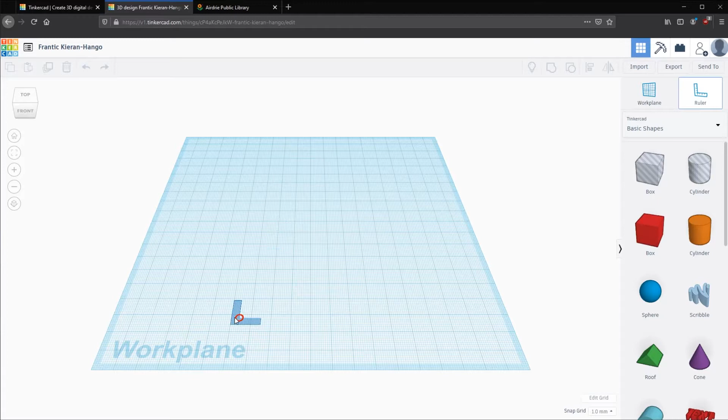So what I'm going to be creating is a little coin for my father. He plays a lot of pool or billiards, and he wants a coin so that we can decide who gets to break first.

So I just dragged out this ruler because I know how big I want it to be, and it'll help me measure that.

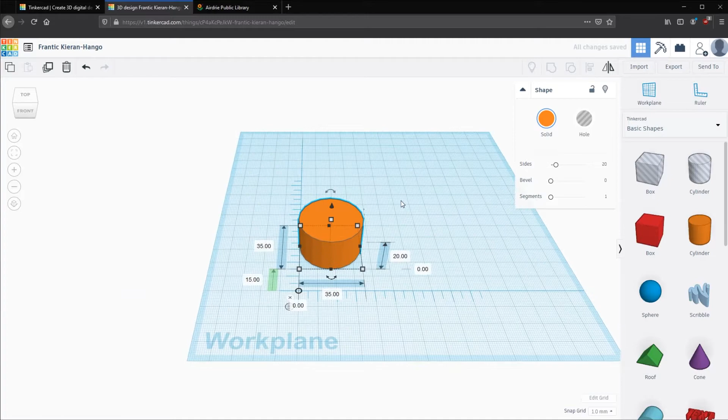So I want this coin to be 35 millimeters by 35. And then I can middle click to drag around and get a better look at this. Right click to kind of rotate around.

Let's make this 4 millimeters thick. This is a good base for our coin.

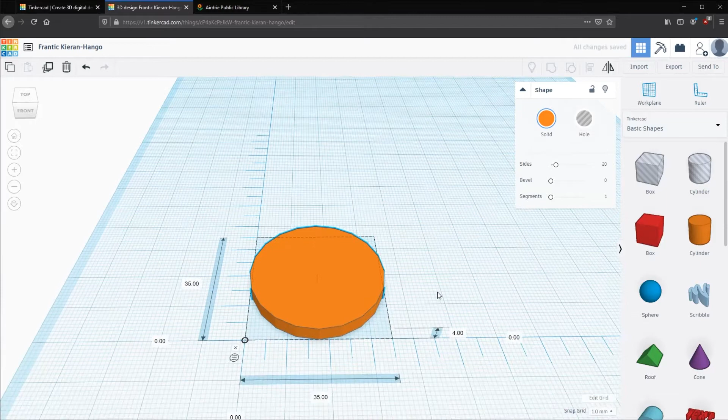Put that into the corner of our ruler, and then I can take this hole cylinder. These striped shapes are called holes up here, and so when I put this together with one of our other shapes...

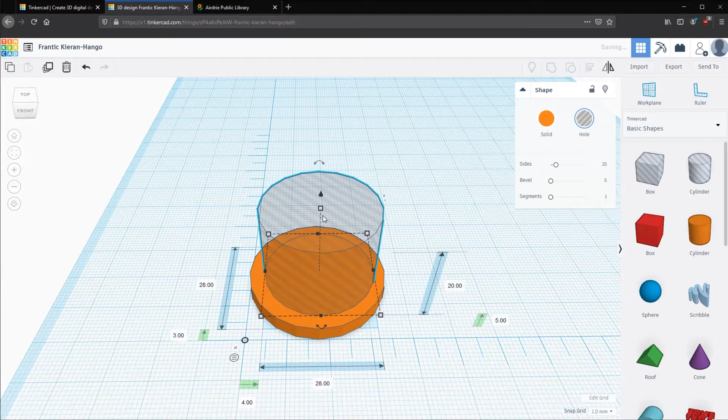I can select both and hit the group button. You can see it actually cuts a hole into that shape. I'm going to undo that because I think it's a little deep and not quite centered here, so let's just make sure that's in the center.

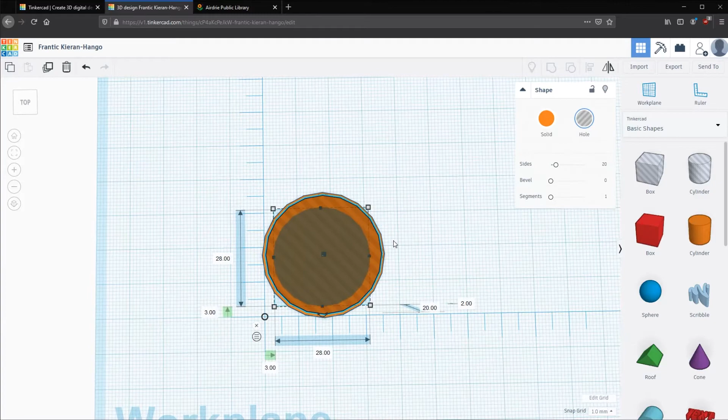This is 28 by 28. Our coin is 35 by 35.

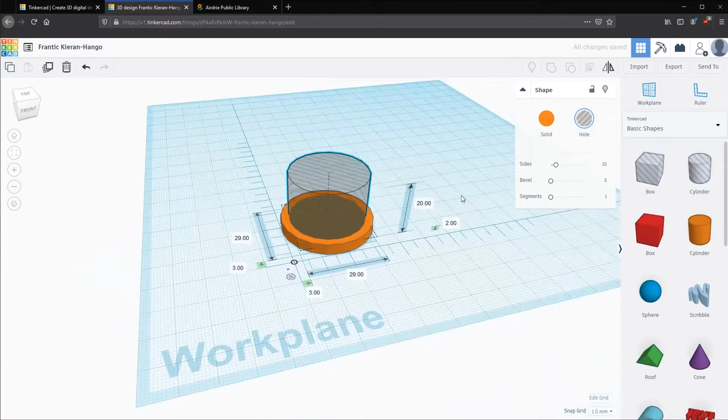Let's bring it up a little bit more. Group that and see how that looks.

Be good, quite even, but actually this cylinder, I can see all the edges of it, and I don't really want that. So I've selected the cylinder here, and I've gone onto the side here.

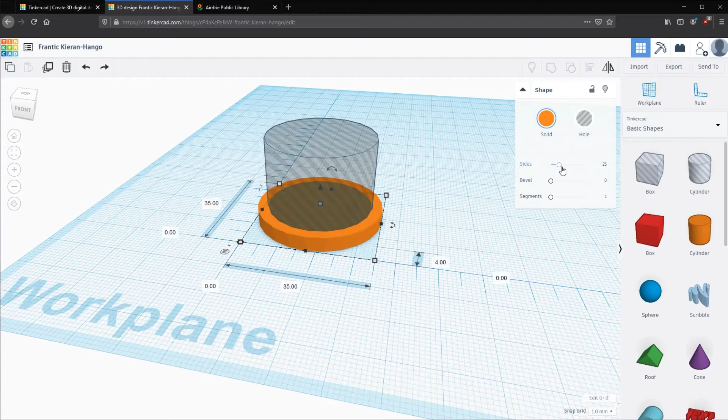I'm going to drag up this side slider, and you can see that has added a ton more sides to it and makes it much more circular.

I group these now again. That should be a little bit better. But same with this hole, we need to create more sides on this. Group that together, and there, it's a much more seamless circle.

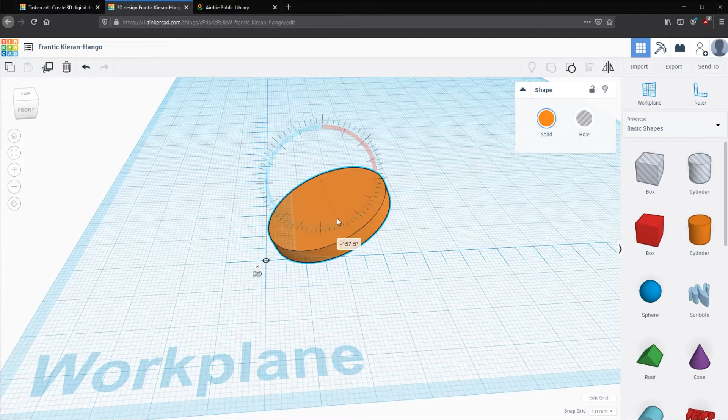I'm going to flip it over and do the same thing on the other side. Take out this cylinder, and I think it was 29 by 29.

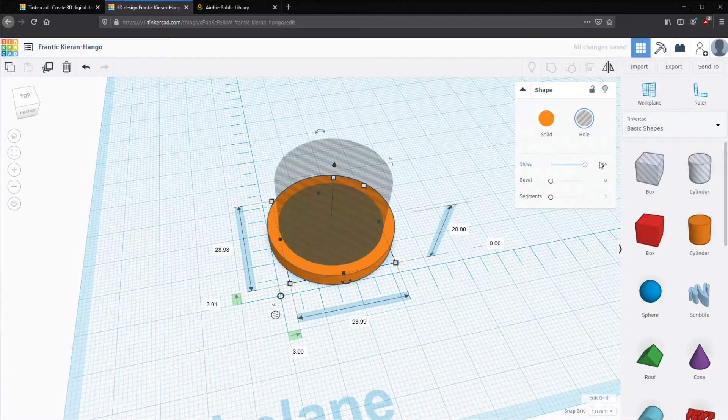Turn up the sides on it, and then group it together. Oh, that punched a hole straight through it. We don't want that. I'm going to drag it up using this up arrow, and then group it together again. There we go.

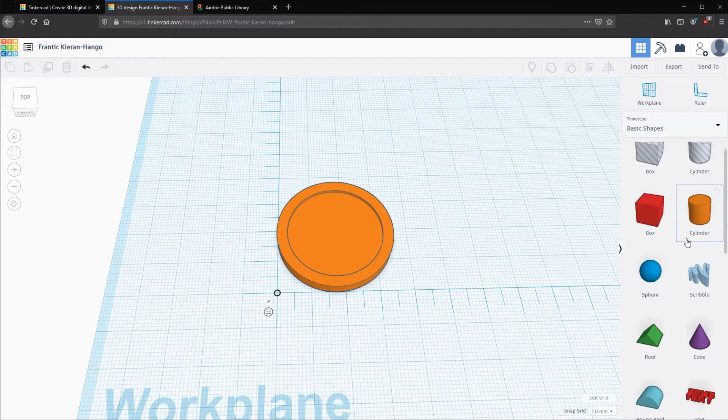So now let's put some text onto it. I just dragged out this text on the side here, and I can make it bigger or smaller.

And in the text box over here, I can type what I want it to say. It's going to be Wes's...

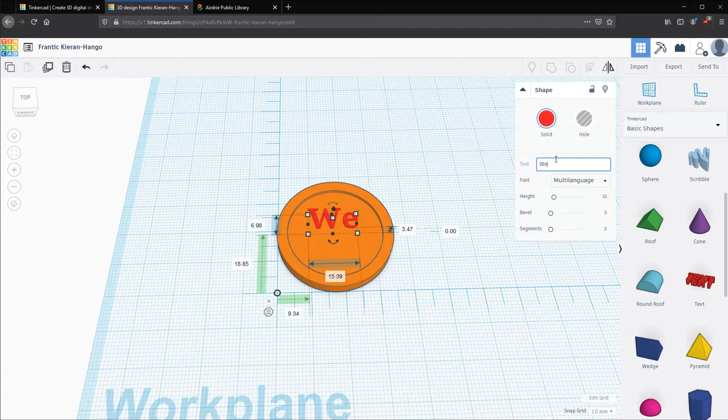One more text: Pool Hall.

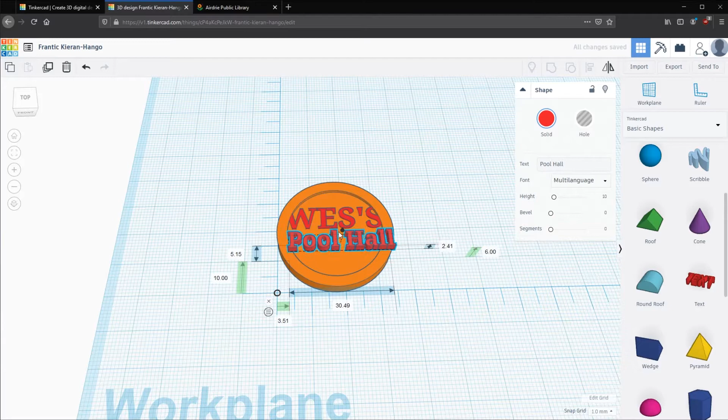Now let's get these appropriately sized.

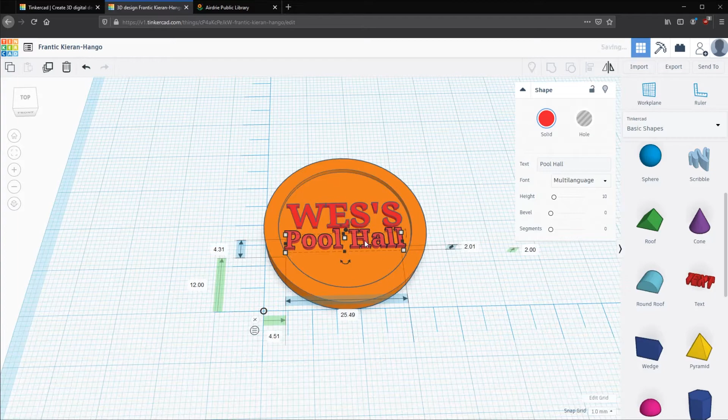How does that look? Pretty good. Maybe we can add a little more interest into it.

I'm just going to bring the box into here, make it really thin and flat, just to give it a little bit of an underline here.

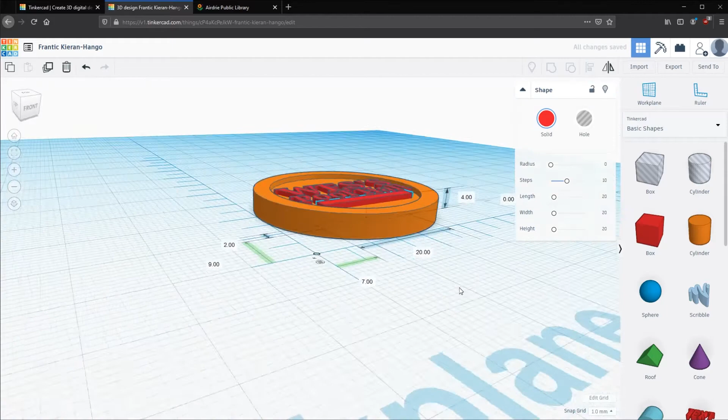Then I'm going to actually duplicate this and put it up top too.

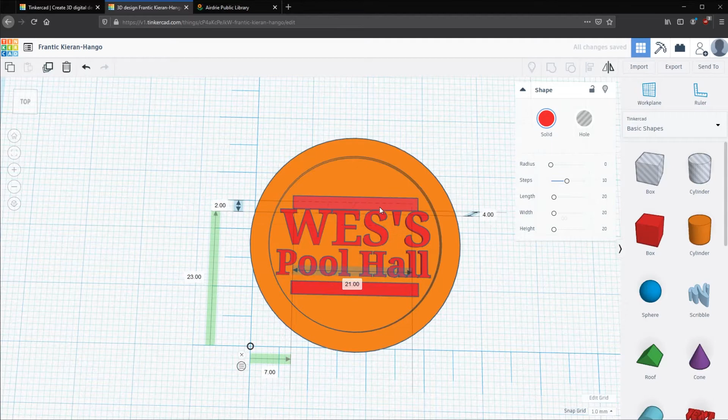Perfect. So I think I'm good with that side. I'm going to group these up again so they're all one shape. And we can see that it actually turns it all to one color as well.

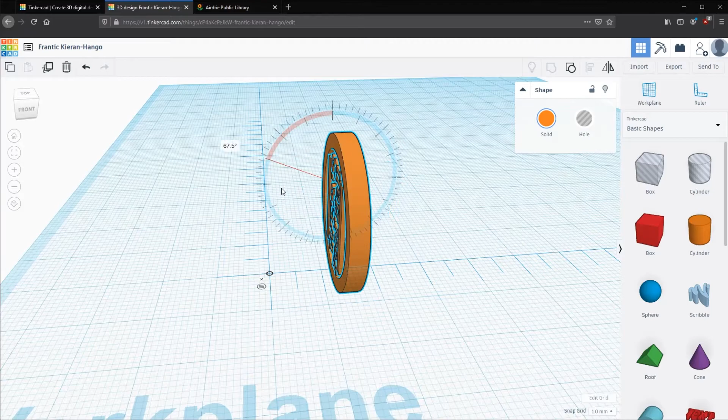Then we're going to flip it back over. And uh-oh, you can see the shapes on the other side. So we're going to have to ungroup these and make them not stick through on this side. Just by doing this.

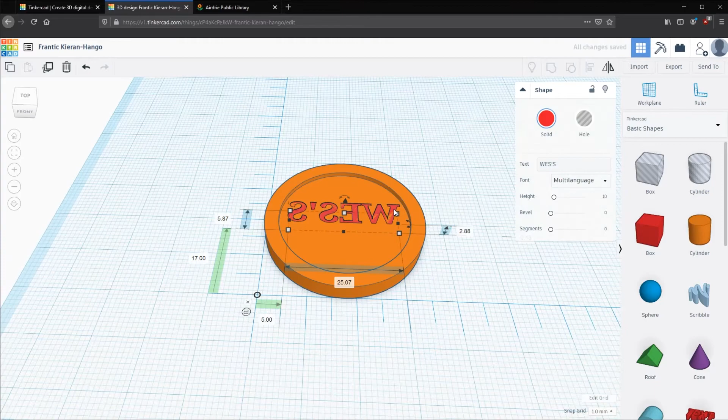I grab this, just the text. There we go. And that looks fine on this side too. Perfect.

Okay, this is our bottom. Now I'm going to make a little bit of a picture over here.

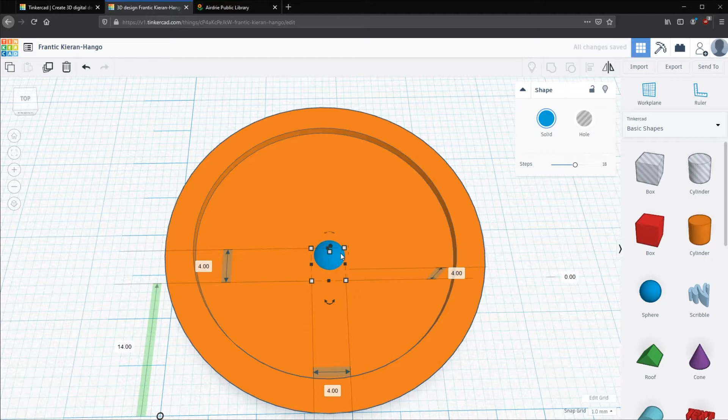I'm going to drag out some of these, and we hit Control D to duplicate.

And I'm just going to lay these out like it is in the game.

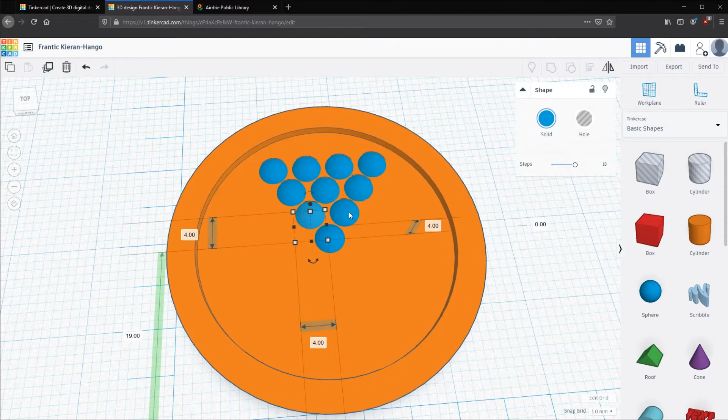I think I might add some interest to this too. I'm going to hold Shift and select all of these, move them back a little bit. Then I'm going to take these ones and move them forward just a bit.

And select these middle ones and make them just a little bit bigger. Maybe not that much - it's snapping, so down in this corner I can change my snap grid to something smaller, and it'll snap into smaller increments. You can see I have much more fine control. I just want to make it a little bit bigger as it comes forward, so it gives that perspective look.

I think this is a little too much as well, so we're going to make that snap even smaller. And these need to be a little bit bigger. I'm holding Shift just so it scales uniformly. It might be too big.

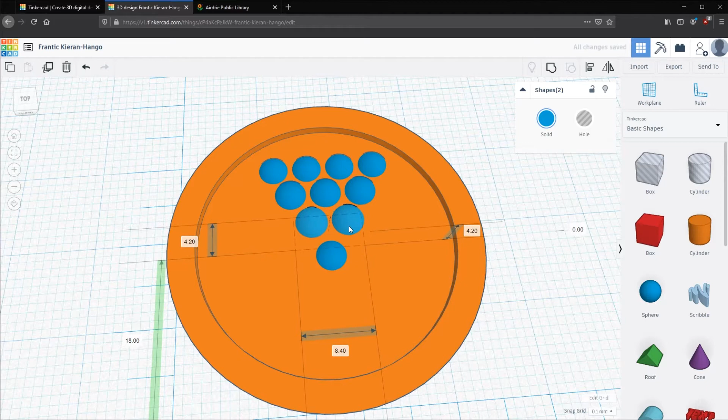There we go. Now it gives the impression that it's coming out at you - a 3D look, more 3D. And now let's make some pool cues.

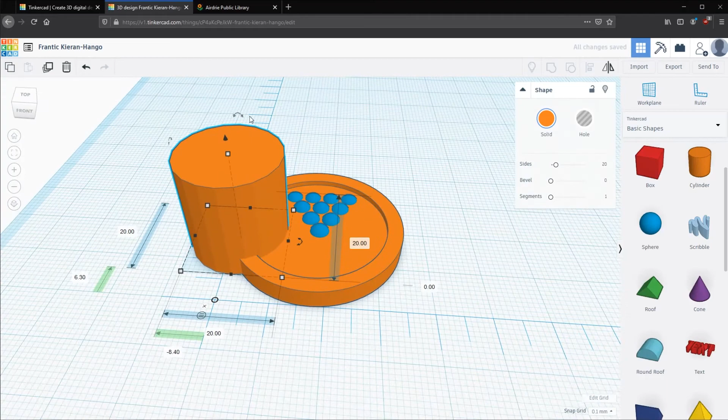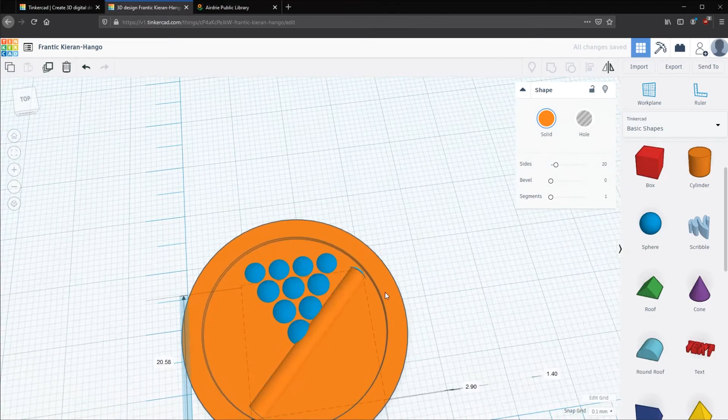I'm going to drag out the cylinder. We're going to put it onto its side. Make it small and long. Before I rotate it like that, I want to make sure I have it the right size.

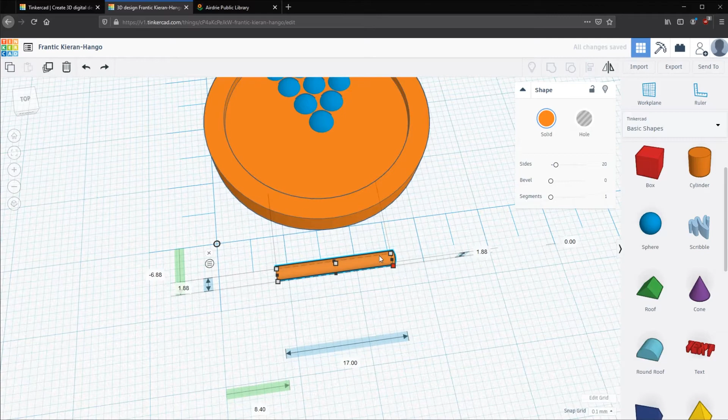It needs to be a little bit thinner. Oh, more. And let's see how that looks over here.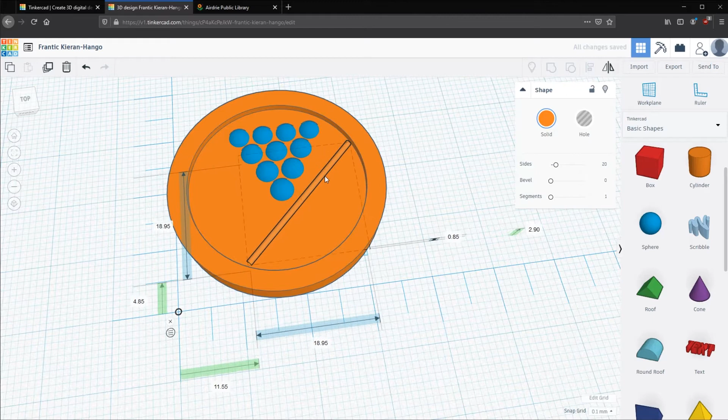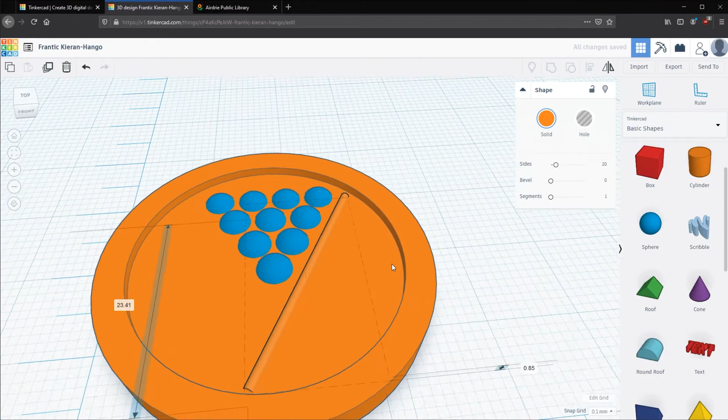That looks pretty good. Let's make sure it's attached to the rest of our coin. Now I'm going to do the same thing I did earlier, using Control D to duplicate, and then rotate it around.

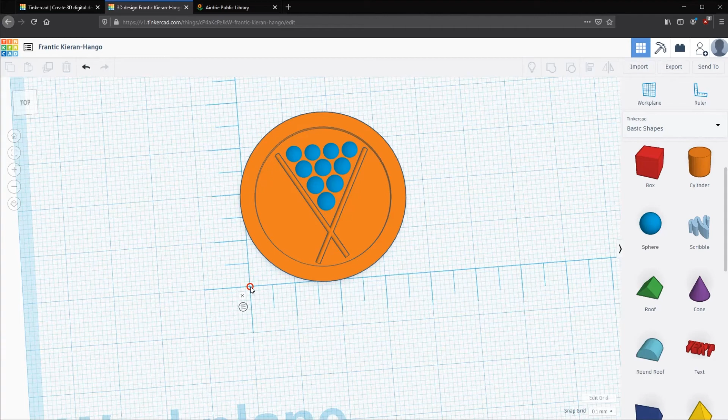That looks pretty good, but I'm not actually sure that those balls are centered on our coin. So I'm going to put this ruler right in the corner, select everything, and make sure I have it lined up with the ruler.

But 35, half should be 17.5, I think. Let me pull out my calculator just to make sure. 35 divided by 2 is 17.5, yes.

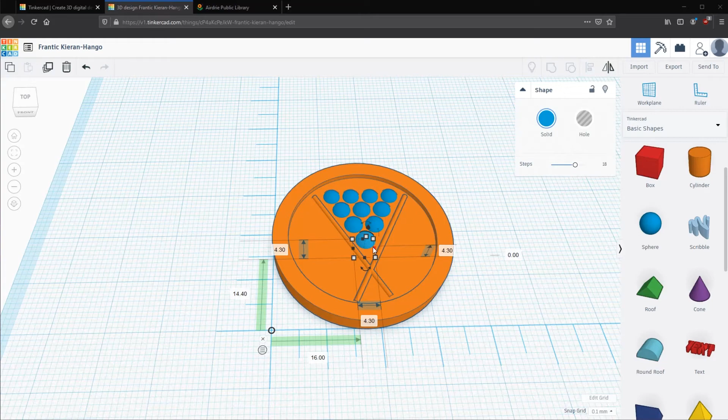So we can see that this here is at 16. We need to move all of this over a little bit just to make sure it's in the center.

Oh, and we're getting a different measurement from there. Oh, so it's measuring to the edge of the ball, not to the center. So we're going to have to do some quick math as well.

The ball is 4.3 wide. So 16.2 plus half of 4.3 is 2.15, sorry. So actually 16 is in the center. Look at that - we had it right all along.

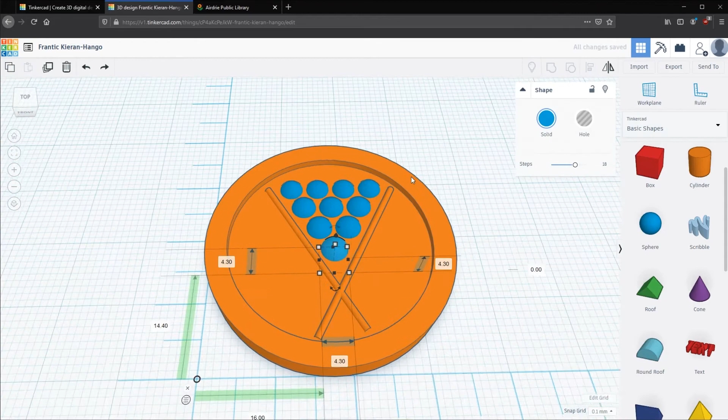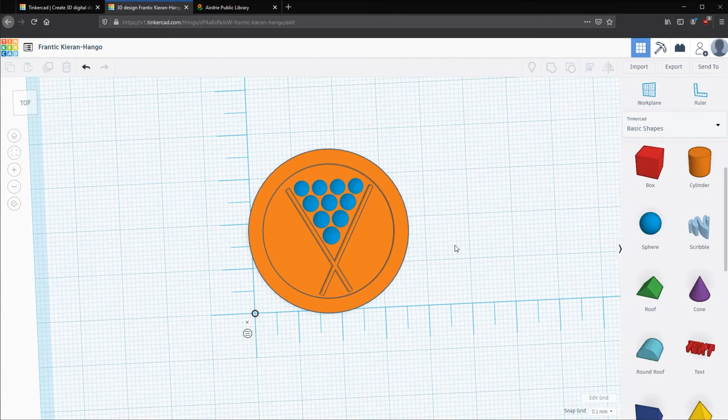Let's just make sure these cues are centered. There we go. I think this looks good.

I might make these pool cues a little bit longer. They kind of stick out the edge - we don't see the ends of them. There we go. That looks pretty good.

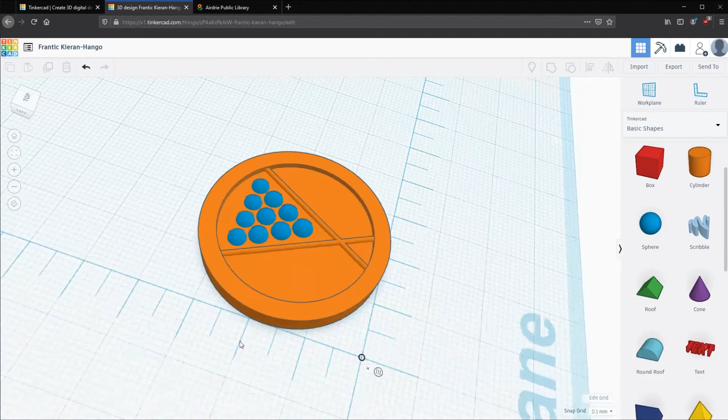I can group these. It should all turn one color if it worked. Yes, okay. And now we have our coin.

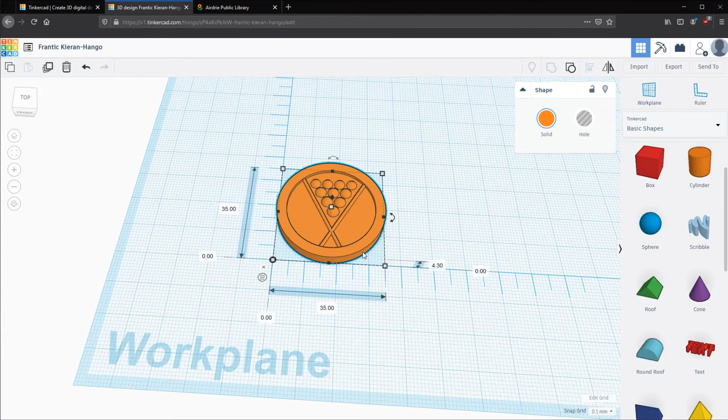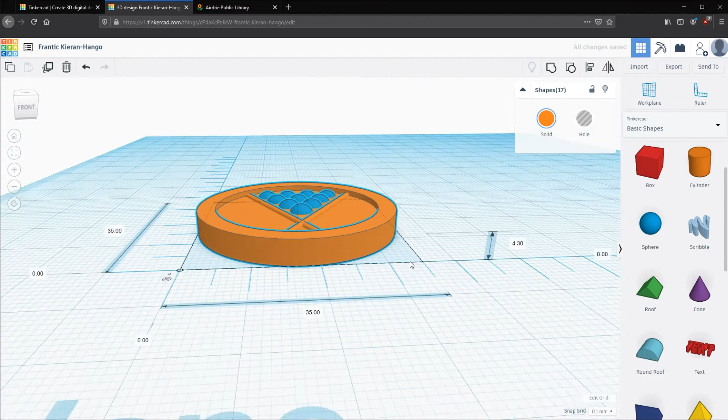Let's just take a look at it both sides again. Ooh yeah, we've got the bottom of those balls sticking through the back here. So we're going to actually undo that and ungroup it. Maybe we can flatten these somehow.

I'm going to select all of them at once so that I can edit all of them at once, just by holding Shift and clicking on them. Okay, I think I have all of them.

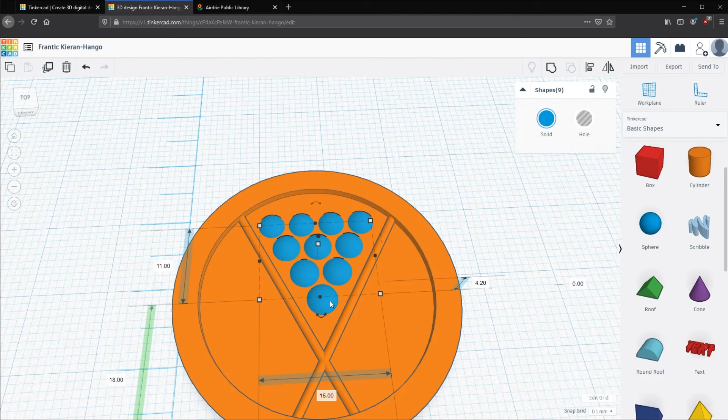Now I can flatten them a little bit and raise them up, and turn them into pancakes. And I don't think they're sticking through the bottom anymore, so that's perfect.

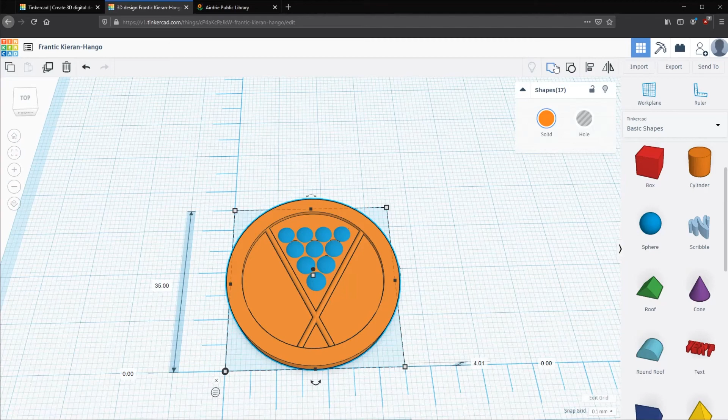And now we can group them. Perfect. So now I have my coin. I'm going to name it pool coin.

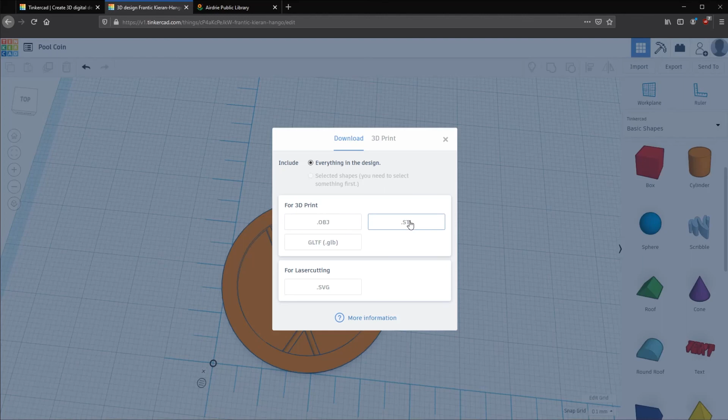And here's the next step. So I hit export in the top here, and I want to make sure I'm exporting everything. Then I can export it as .obj or .stl. Both of them work, but I prefer stl, so that's what I'm going to do.

So it might take a second depending on the complexity, but once it's done, it'll ask you to save it.